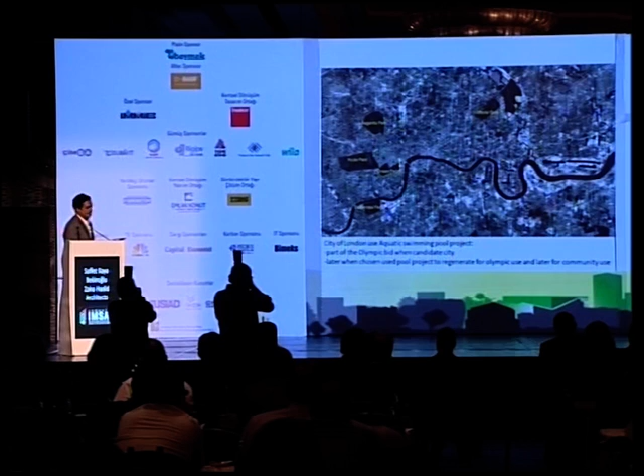Anyway, there's no projector, but you can see this is the Thames River. The west of London is very developed, but in the east, next to Victoria Park, the yellow area is the Olympic Park, which was assigned for the Olympics.

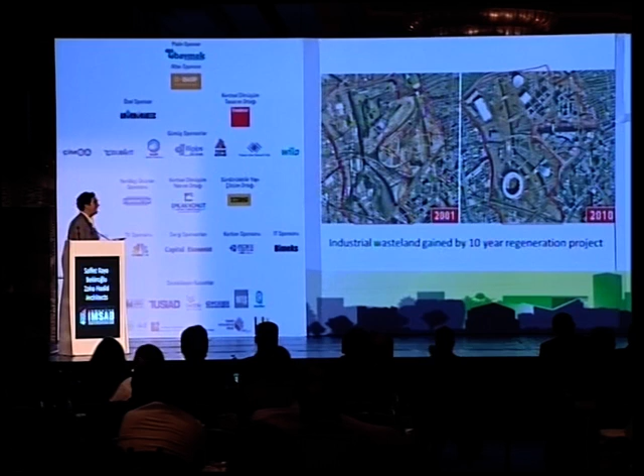For the 2012 Olympic Games, London was a candidate city. So what London did was take this opportunity to their advantage and evolve, transform, and regenerate this area, which was an industrial wasteland, into a new community, while also using it for the Olympics.

This is how it was before, and in 2004, when I first went to the site, it was like a car graveyard with wild dogs running around, because the water and the land were contaminated. I'm going to show through this process how it evolved.

The site was very restricted: there was the riverside, a rail line, and two power lines on the side, so it was a very tricky site. The red lines are the power lines, the black dashed lines are the rail, and the blue is the canal.

This is our site, and we were supposed to build a big aquatic center for the Olympics, with a seated audience occupancy of about 17,500. That site, which was an industrial wasteland, turned into the Olympic Park.

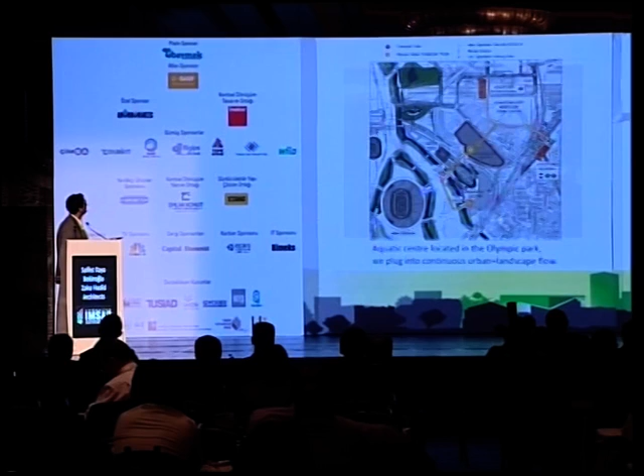Later it turned into a community in East London, like Stratford and Leyton. So what was important is that when we were designing our aquatic center, we made sure to analyze the site urbanistically and see how we could plug in and be part of the urban fabric.

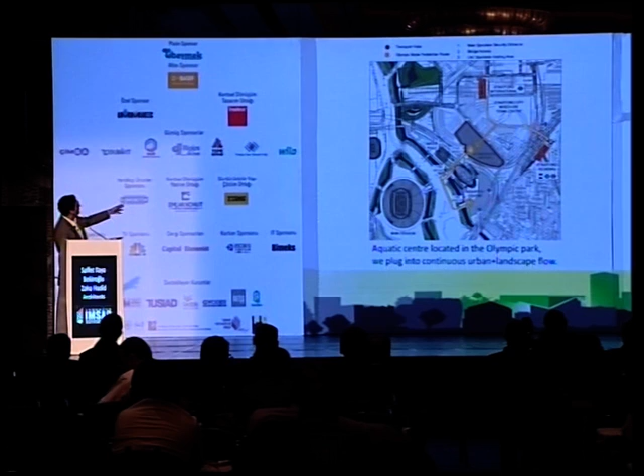You can see there's a Stratford International Terminal, and how we arrive and how it's distributed and connected to the city. This is a very important slide that I want you to look at.

So what was important was that, as an architect, not just to design a building, but design a strategy for how this building, this design, is going to transform within 10 years from Olympic mode to legacy mode, which is a community pool. And it's still going on actually - as you can see, we're in 2013, and now the pool is going to relaunch itself as a community pool.

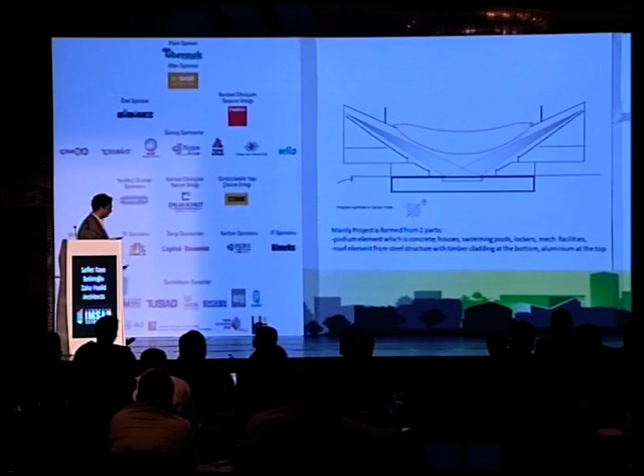When first the London Development Agency came, they said that anyway London doesn't have any 50-meter Olympic pool, so we're going to build it anyway, whether we get the Olympics or not. But the smart thing about it is that they came up with such a brief that they used it as a bid for the Olympics. And we actually went and presented this project to the Olympic Committee when they arrived, and we said that we have a project already designed, and if we get the Olympics, we're going to build it.

The trick is how you design a pool for the Olympics, which is going to be 6 weeks, but then later it's going to transform into a community pool - because the Olympics want 17,500 seats, and then the community pool wants 2,500 seats. So there's actually a decrease of 85% shrinkage in the occupancy. And this is the story.

First, and this competition - all the European public projects need to be competition. So this was an international competition, and this was the first project I designed in 2004-05 when I arrived to Zaha Hadid Architects.

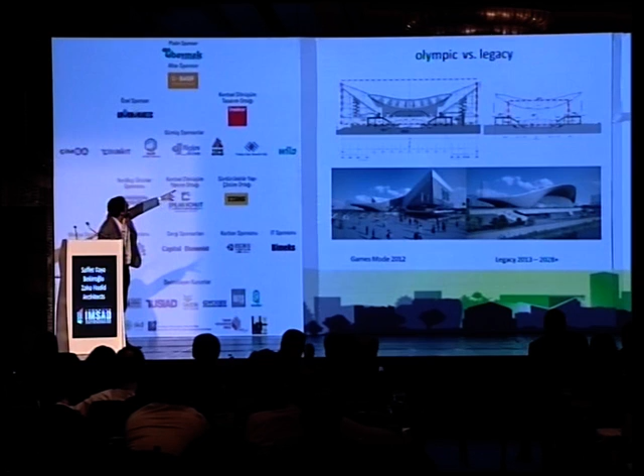You can see on the right how we introduced the glazing, and all the temporary wings, made from metal decking and PVC, are gone.

And the nice thing about using steel or PVC is that it's recyclable.

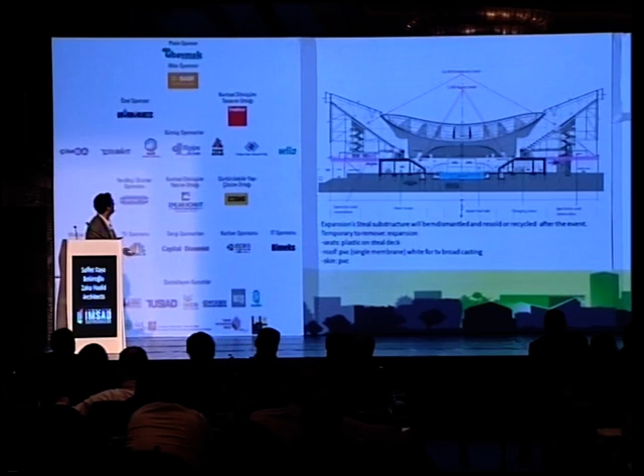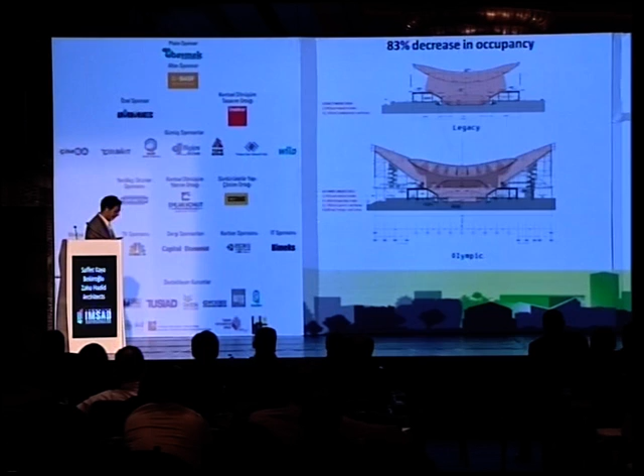Another thing I'd like to point out: to reduce the envelope further, we took the training pool and put it under the arrival bridge, which saved about a third of the envelope. You'll see this in a section later on.

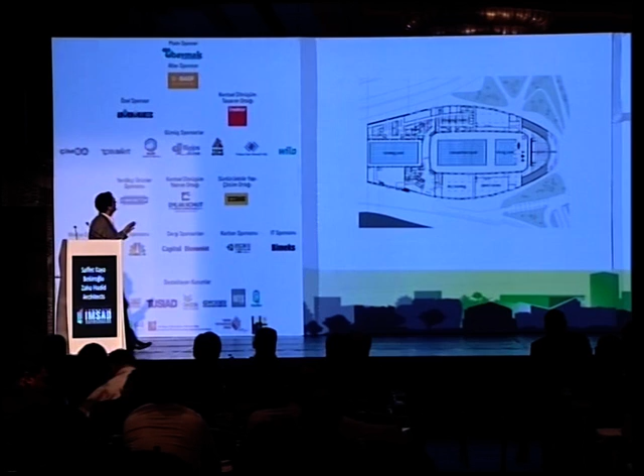This is the Olympic mode with the extra seats, which you'll see go away. And this is without the seats, where the glazing is introduced, with the park around it. This is the park, and the arrival bridge towards the park, with the pool underneath, which I was telling you about.

In this section you can see it: there's an arrival bridge that goes across the Lea River, and we took advantage of the bridge—since it wasn't public, it was just the warming-up pool—and used that as an envelope to reduce the size of the project.

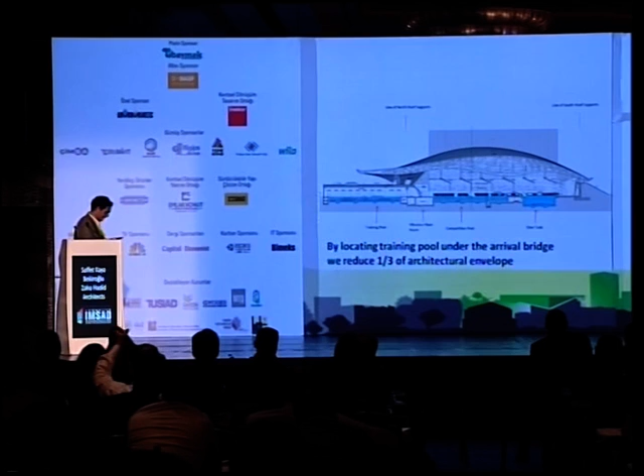One important thing was reducing the carbon footprint. That's why they strictly used train and canal transportation for construction.

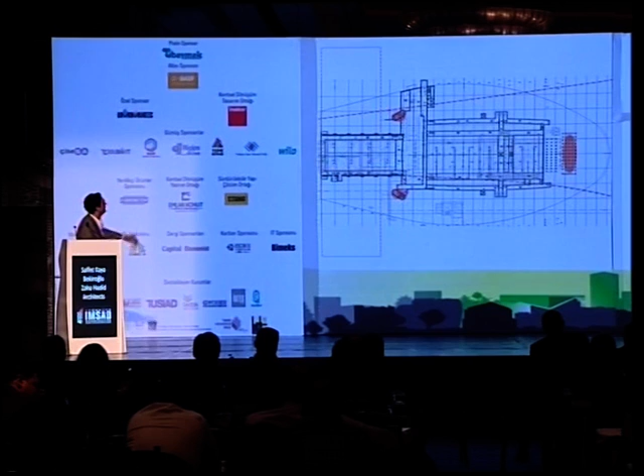These are the structural aspects—we have power lines to deal with. We had to touch down in 3 major spots, the red ones, and then span from north to south. That's how you can plug in the temporary seats, which were removable. It's a three-leg roof.

One reason is that you couldn't put additional columns because of the sight lines—everybody needs to see the pools. The other reason is the city power lines, which we couldn't disturb.

And these are the structural versions. As you can see, all these temporary off-the-shelf elements are resolved, and this is the final version. These are gone.